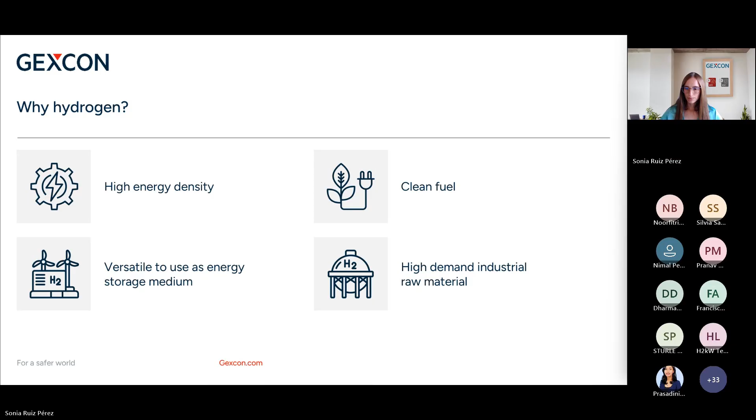So how abundant is hydrogen? Well, hydrogen is actually the most abundant element in the universe. It makes up about 75% of the universe's elemental mass. But on Earth, it's not quite as dominant. It only accounts for about 0.03% of the Earth's mass, and that's because it rarely exists on its own. It's usually bound up in compounds of water or hydrocarbons.

Still, it's estimated that we have around 1.8 trillion metric tons of hydrogen here on Earth. So the issue isn't really whether hydrogen is available. The real challenge is producing enough clean hydrogen to meet future energy needs.

According to the International Energy Agency, we will need around 530 million metric tons of hydrogen annually by 2050 to stay on track for net zero goals. So that's a huge leap from today's production levels, and also a major driver behind current investments and innovation in hydrogen technologies.

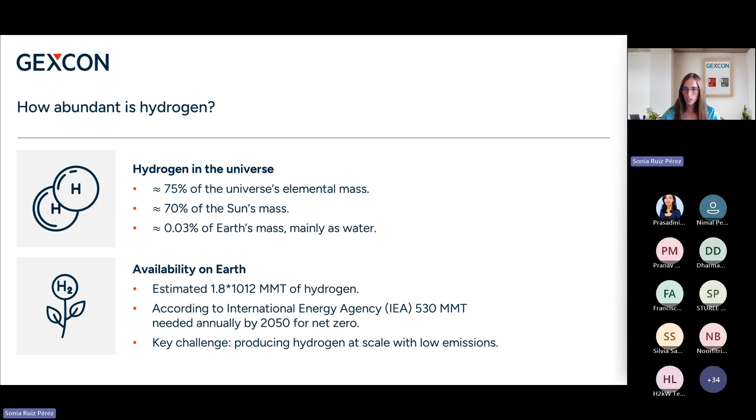Which takes me to the very important fact that hydrogen can be produced in several ways, and the carbon footprint varies significantly depending on the method. Brown hydrogen, for example, comes from coal via gasification, and it comes with very high CO2 emissions. Gray hydrogen is produced from natural gas and is currently the most common form of hydrogen, but it also releases CO2 into the atmosphere.

Blue hydrogen is similar to gray, but CO2 emissions are captured and stored using CCUS methodologies. Then we have white hydrogen, which occurs naturally underground. And this methodology is still in the early stages of exploration, but it's generating a lot of interest for future potential.

Green hydrogen, on the other hand, is the cleanest option for hydrogen production. Hydrogen is produced via electrolysis of water using renewable energy sources like wind or solar. Pink hydrogen uses nuclear energy to drive water electrolysis. So this is an important realization that not all hydrogen is created equal, and reaching net zero will depend on how quickly we can scale up low emission hydrogen production methods.

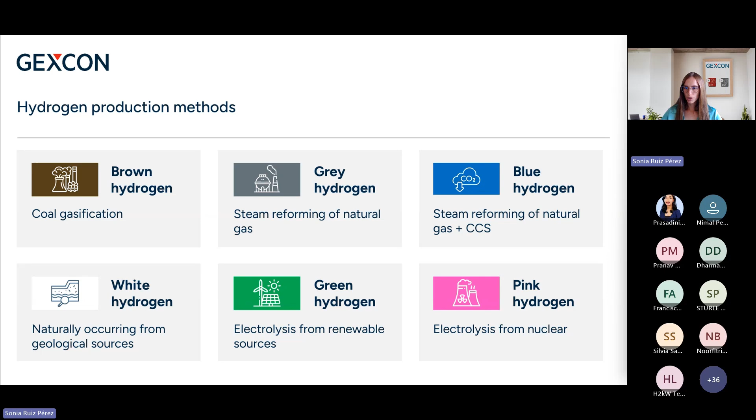So it is clear that hydrogen has a lot of potential, but it also comes with some unique safety challenges that we need to address, which is the main focus of today's webinar. So just to give you a bit of a run through the different unique properties of hydrogen. Hydrogen is extremely buoyant. So hydrogen gas typically rises up quickly, but in its cold liquid form, it can behave like a dense gas as well.

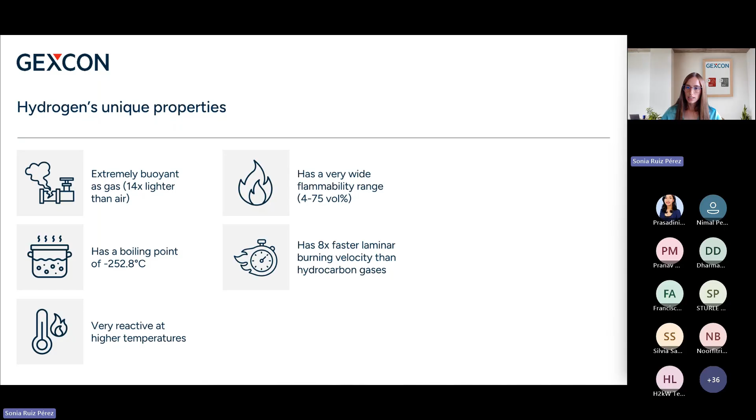Then liquefaction requires extremely low temperatures, near absolute zero, so near 0 Kelvin, which makes storage and transport quite challenging. Hydrogen is very reactive and has a very wide flammability range, which means that it can ignite in a wide range of concentrations in air. Hydrogen's laminar burning velocity is around 8 times faster than most hydrocarbons, increasing the likelihood of a transition to detonation. It requires very little energy to ignite, and it can auto-ignite at high pressures.

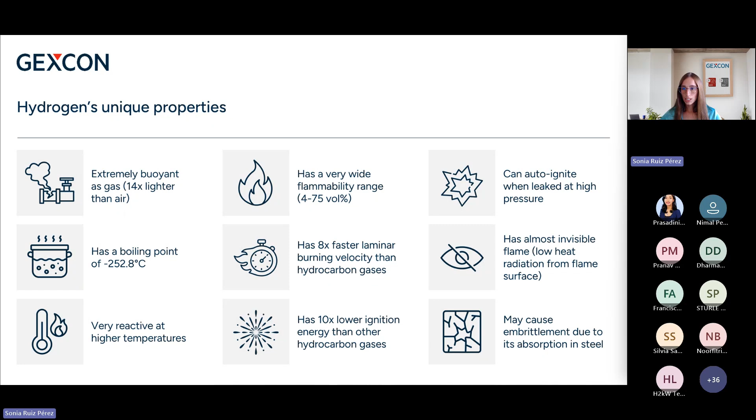Additionally, hydrogen flames are actually nearly invisible in daylight, posing certain detection challenges, and it can cause material embrittlement. So selecting the right material for hydrogen storage or handling in general is quite essential. So it's because of all of these unique properties that handling hydrogen safely means more than just care. It also requires a deep understanding of its behavior under different conditions. And that's where hazard modeling comes in.

Hazard modeling helps us predict the potential consequences of industrial accidents. So we can use hazard modeling for designing safer facilities, setting safety distances between equipment or between industrial facilities and urban areas, as well as to implement mitigation strategies such as ventilation, fire suppression systems, or physical barriers.

So depending on the hazard type, we apply different modeling approaches. We have fire modeling, explosion modeling, and dispersion modeling. Fire modeling evaluates thermal radiation. Explosion modeling estimates overpressures and shockwave propagation. And dispersion modeling simulates the spread of toxic or flammable gases. So it's with all of these insights that we can understand the potential impact. And that brings us to the next question, which is, how likely are these events to occur? And that's where the concept of quantitative risk assessment, or QRA, comes in.

QRAs typically consist of two different parts. We have consequence modeling and risk modeling. Consequence modeling predicts what happens if a hazardous release occurs. So it estimates the effects of fires, the effects of explosions, or the effects of gas dispersion on people and infrastructure. So it helps design safer facilities through prevention and mitigation. So that's the first step.

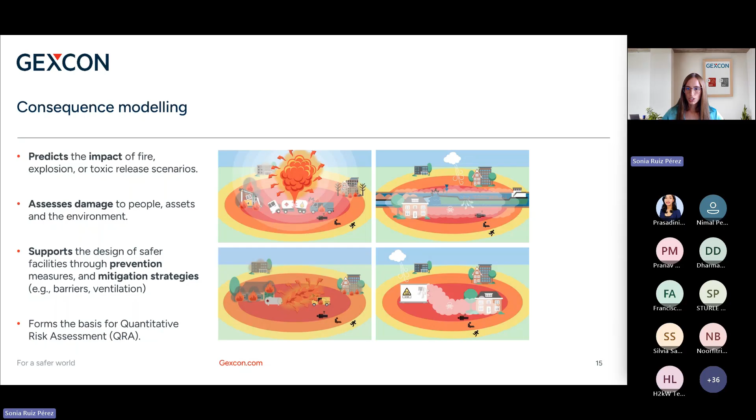But then, while consequence modeling tells us what could happen, risk modeling assesses how likely these events are, combining likelihood and consequence information. So typically, risk modeling uses failure frequencies, weather data, and probabilistic information about people, operations, and system reliability. So together, consequence and risk modeling can help determine if the risks at a facility meet safety regulations and whether that risk can be considered acceptable, or if it's not acceptable, it informs decisions on which are the best prevention or mitigation strategies.

Now that I've covered consequence and risk modeling, let's see how to make the whole process faster, easier, as well as more reliable. So using dedicated software tools like EFFECTS and RISKCURVES, you can really streamline this quantitative risk assessment, which will save you time and will lead to more accurate results.

EFFECTS and RISKCURVES are advanced modeling tools developed by Gexcon to support hazard and risk assessments. And they are both built to handle complex calculations while providing clear, consistent, and transparent results to support safety decisions. The main difference between one and the other is that EFFECTS focuses on simulating the physical effects of accidental releases like fires, explosions, and toxic dispersions, and translates these into potential impact on people and infrastructure.

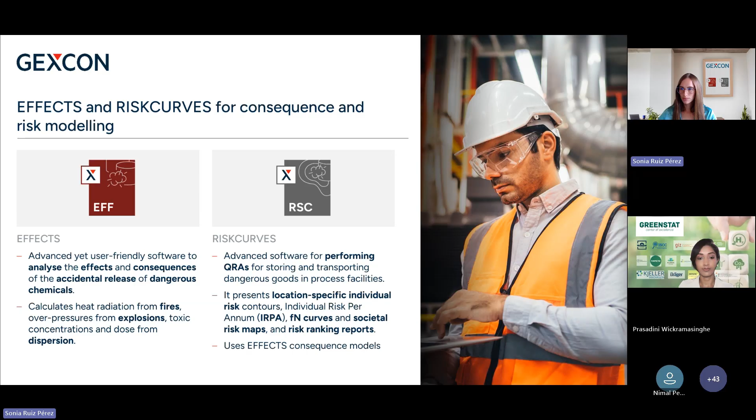RISKCURVES, on the other hand, takes those results further by performing full quantitative risk assessments using a range of risk metrics to quantify the overall risk. EFFECTS is commonly used for preliminary consequence assessments, sensitivity analysis, supporting process hazard analysis, and it plays a key role in compliance reviews, facility siting, and even incident investigations.

RISKCURVES is typically used for more advanced probabilistic studies, including full QRA studies, ALARP demonstrations, emergency response planning, and preparing safety cases for regulators. So together, they help organizations make well-informed decisions on risk reduction, design, and urban planning near hazardous facilities.

So these software tools are used in industries where hazardous materials are handled. So that goes from oil and gas, refining, petrochemicals, even to chemical manufacturing. And they are also vital in the energy transition, as we've adapted our models to support emerging technologies and chemicals like hydrogen, ammonia, battery energy storage systems, as well as CO2 in the context of carbon capture and storage.

So our mission is to enable a safe decarbonization, protecting people, assets, and the environment, while helping deliver reliable and affordable energy for both industry and society.

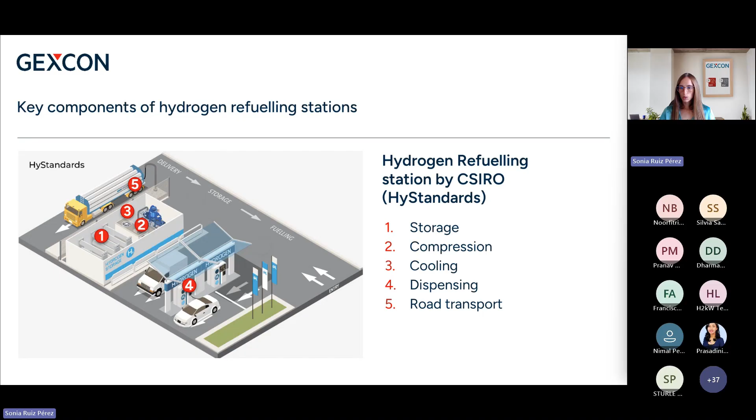So just like petrol or diesel vehicles, hydrogen fuel cell vehicles are refueled at purpose-built hydrogen refueling stations. A typical refueling station includes storage tanks for compressed hydrogen, compressors to pressurize the gas, a pre-cooling system to ensure safe and efficient fueling, a hydrogen dispenser where the vehicle is refueled, as well as transport, as hydrogen is delivered to the station by road. So understanding how these components work is key for identifying what are the potential safety challenges.

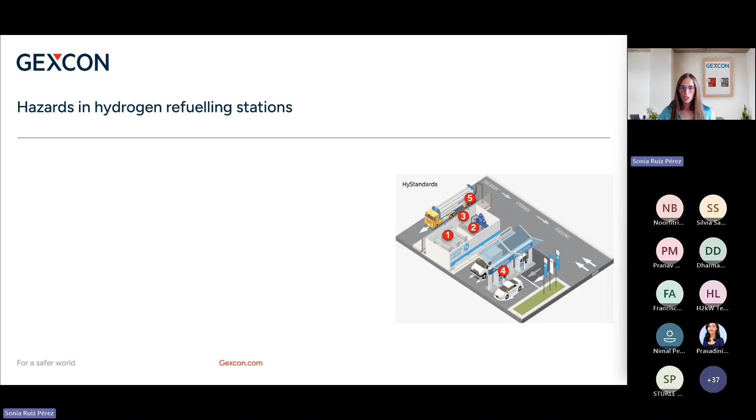So let's look at these different challenges on a hydrogen refueling station. So for this particular case, some common hazards at a hydrogen refueling station include leakage from storage tanks due to mechanical failures or poorly designed joints and fittings, pipeline leaks, particularly in high pressure sections, risks associated with compressors, such as internal explosions or leaks from worn seals,

and leaks during vehicle dispensing, often caused by improper procedures or insufficient inspection. So if not properly managed, all of these hazards can lead to serious accidents.

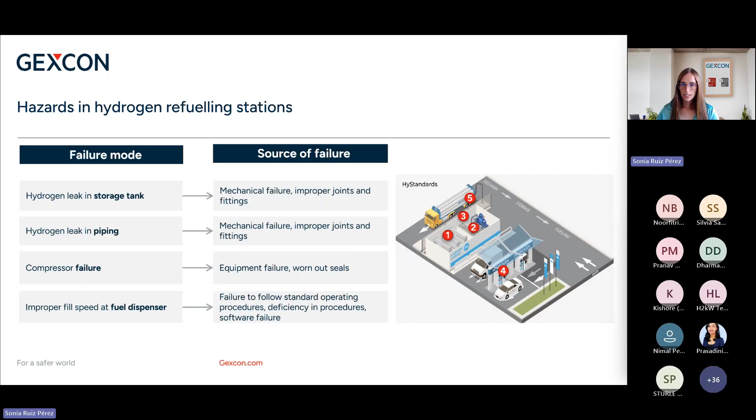So building on these different hazards that I just covered, it's important to understand how compressed hydrogen is handled at refueling stations. So these hydrogen refueling stations supply high purity, high pressure hydrogen fuel to two main vehicle types. There's light duty vehicles like passenger vehicles, and there's heavy duty vehicles such as trucks and buses.

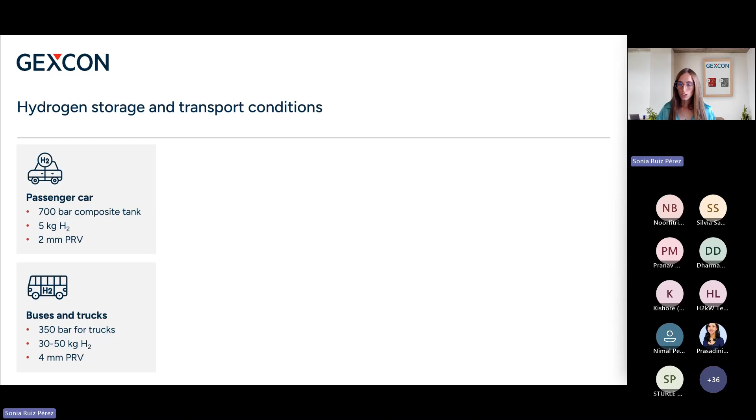Typical operating pressures differ. So passenger vehicles, for example, usually have 700 bar composite tanks holding about 5 kilograms of hydrogen. And they are equipped with a 2 millimeter pressure relief valve, meaning any accidental release would leak through a 2 millimeter opening. Buses and trucks use tanks at 350 bar, storing up to 50 kilograms of hydrogen with a 4 millimeter pressure relief valve.

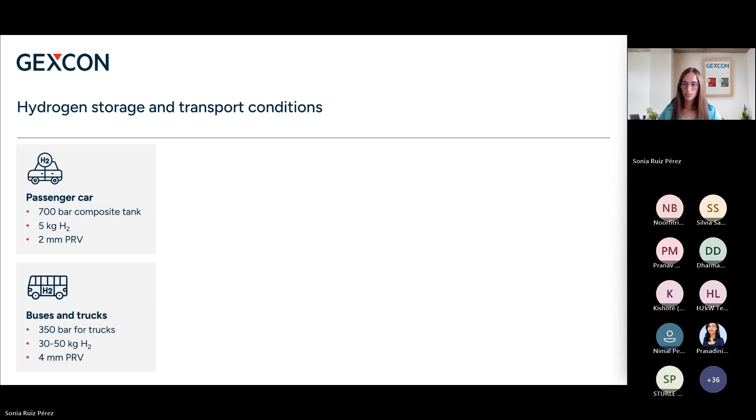When it comes to hydrogen distribution, compressed gas is transported primarily by tube trailers. So most of these tube trailers have 10 cylinders pressurized at 200 bar, each with a 2 cubic meter capacity. Then we have carbon fiber composite cylinders, which are also common. And these are arranged in vertical packs, storing up to 500 bar with about 350 liters of hydrogen each.

Then we also have cylinder packages, which can include multiple bundles. For example, they're typically transported in 16 packages holding 27 cylinders, each at 200 bar.

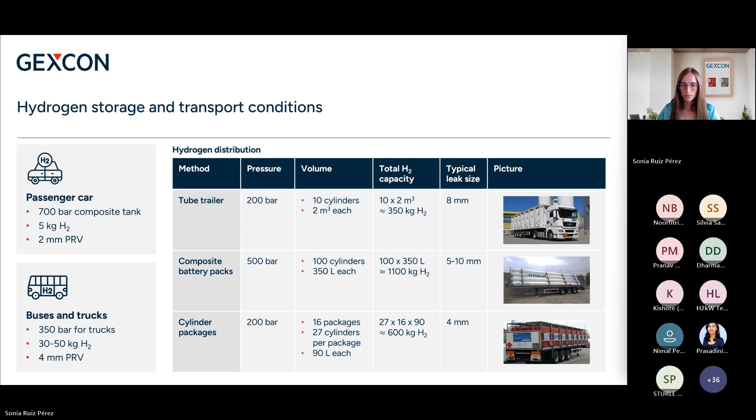So a very common hazard at the hydrogen refilling station is a leak during unloading from the delivery truck. This can happen if the delivery hose fails, causing high pressure hydrogen to escape.

To simulate this accurately, we need a few key details, specifically around operating conditions. So the hydrogen in this particular scenario is stored in composite cylinders, which, as I just said, the operating pressure is usually around 500 bar. Each of these cylinders holds about 350 liters of hydrogen, and the leak would come from a 10 millimeter hose. So these inputs can help us simulate the potential effects and evaluate the risk of the scenario.

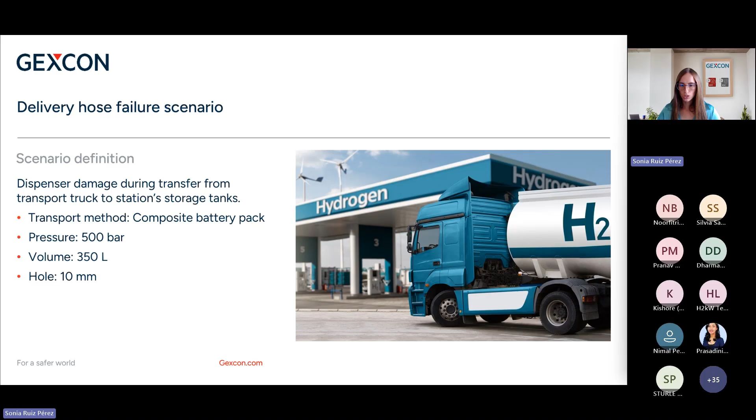So we know that there's a release of hydrogen through a cylinder that contains 350 liters of hydrogen at 500 bar, which is released through a hole of 10 millimeters. When modeling a hydrogen leak, one of the key steps is to understand what could happen next. What are all the potential loss of containment events? And that's where an event tree comes in.

Second possibility is that we have the immediate ignition of hydrogen, which can cause a jet fire. This jet fire is a high velocity, high temperature flame that follows the path of the leak. And the third option is delayed ignition. So the flammable cloud of hydrogen doesn't encounter an ignition source until it's dispersed along wind for a little bit. So we have a generation of a flammable hydrogen cloud that ignites a little bit after it's been released.

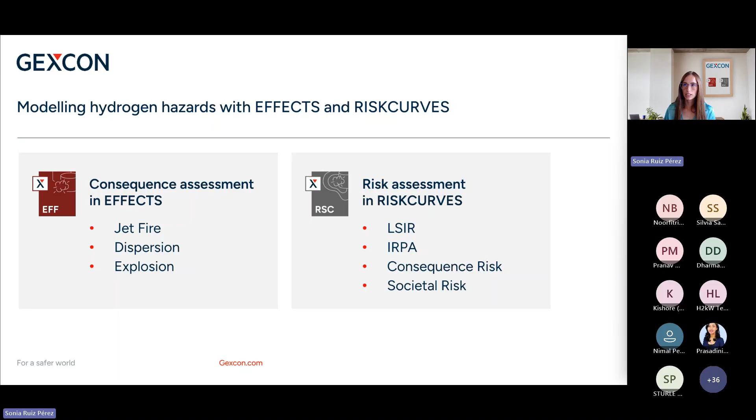So let me start using Effects to simulate these different physical effects. This way you can see what is the heat radiation from hydrogen jet fires, what are the overpressure levels from a hydrogen vapor cloud explosion, and what's the concentration in a hydrogen flammable cloud for this specific scenario that I've just defined.

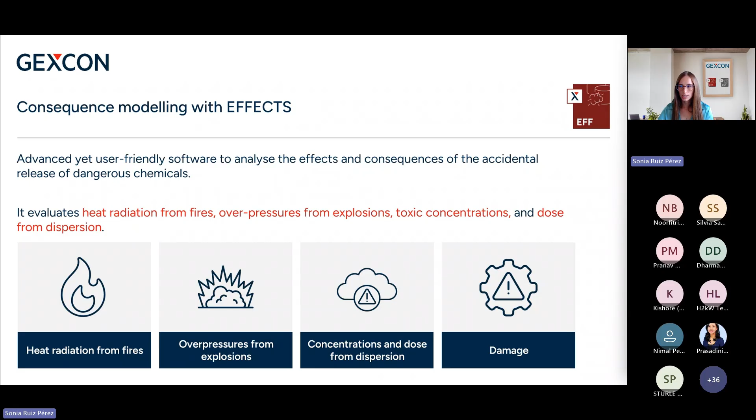So let's first focus on the immediate ignition branch of the event tree. So if we have hydrogen being released and it encounters an ignition source straight away, this results in a jet fire. And this event is especially dangerous because jet fires can deliver intense thermal radiation, and they are directional, following the momentum of the gas, and they can persist as long as the release continues.

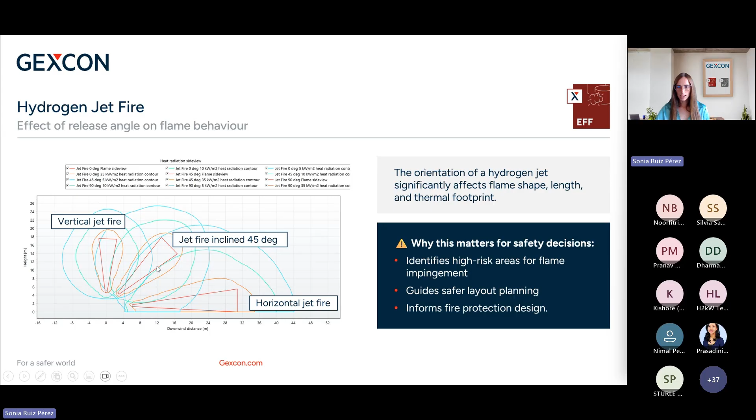So these differences are important for assessing things like flame impingement, planning equipment layout, and designing effective fire protection measures. So for instance, one of the most common protection measures is firewalls. So you could use this type of information to help design such a firewall, like where it would need to be placed and what would be the required height of such a firewall to ensure that it's blocking the effects of a jet fire.

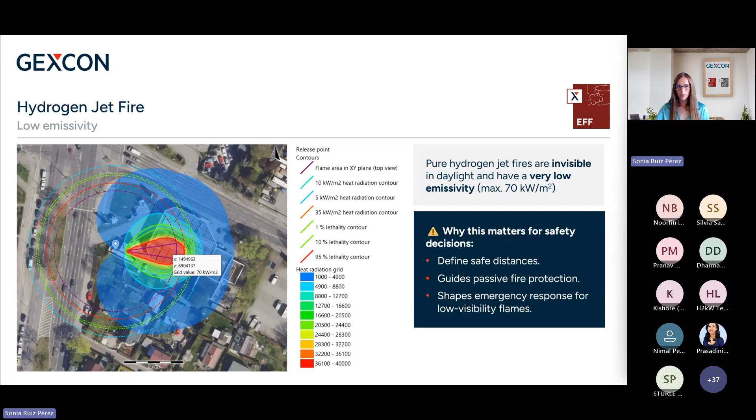Now, let's look at another possible outcome, which is the delayed ignition. In the case of delayed ignition, hydrogen leaks and disperses, forming a flammable cloud. If that cloud encounters an ignition source before dispersing completely, it ignites as a flash fire, which is a fast-moving flame front that follows the cloud.

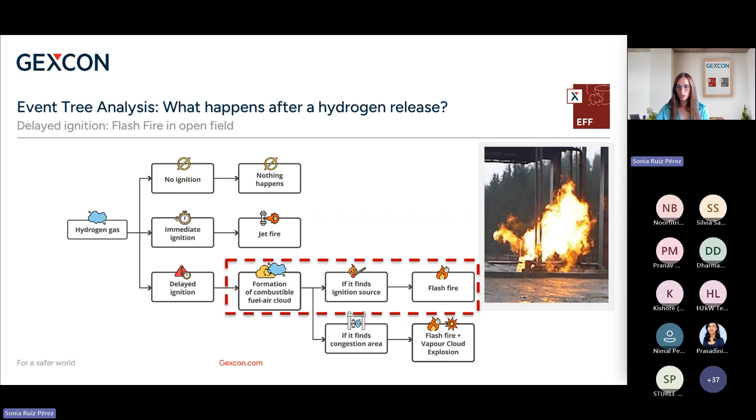So from a safety perspective, this type of behavior has important implications because gas detectors, for instance, should be placed low at the ground near the release point, but also consider accumulation under ceilings or overhangs where this rising hydrogen cloud could ignite.

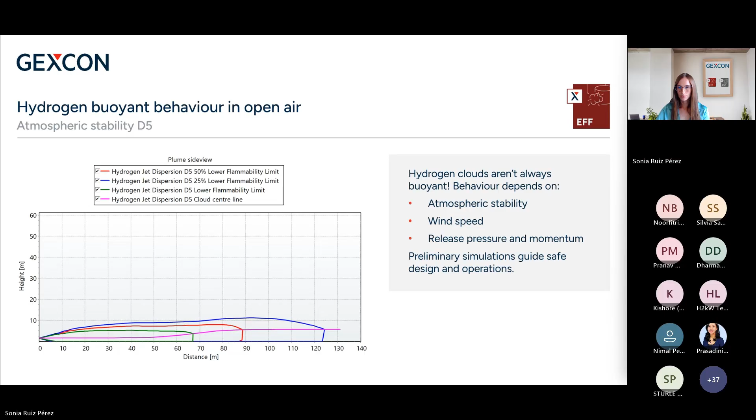Now, if the flammable hydrogen cloud drifts into a congested or a confined area, ignition can trigger not only a flash fire, but also a vapor cloud explosion. So as I explained earlier, this hydrogen release occurs at a refueling station, which is this one over here. It's just located a few meters away from a conventional fuel station.

And this regular refueling station actually introduces a critical hazard, and that is that the roof of the regular refueling station creates a confined corridor between the ground and the ceiling, which is an ideal geometry for trapping a flammable cloud. This setup can significantly increase the risk of detonation, as it restricts vertical cloud dispersion and promotes turbulence upon ignition, which ultimately amplifies overpressure.

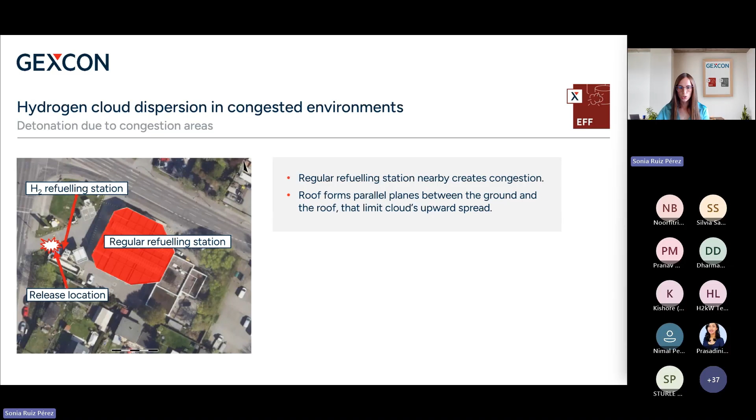And we can assess the hazard using different flammability thresholds, like the LFL, lower flammability limit, which is the minimum concentration needed for ignition, as well as the 50% LFL, where ignition is still possible, and 25% LFL, which is a conservative boundary used for safety planning.

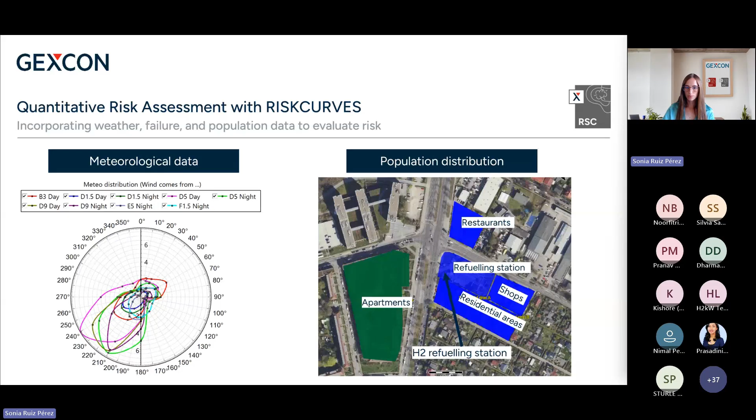Now, let me explain the different risk metrics calculated in RISKCURVES and the results produced in this QRA study. First of all, we have location-specific individual risk, which is the annual probability that a person outside the facility is fatally affected by a hazardous event. And this metric assumes that the person is unprotected, so that means no shelter, no protective gear. That's also a reason why location-specific individual risk is actually a very conservative estimate, because people usually spend limited time outdoors or limited time in certain areas, like they move around different zones.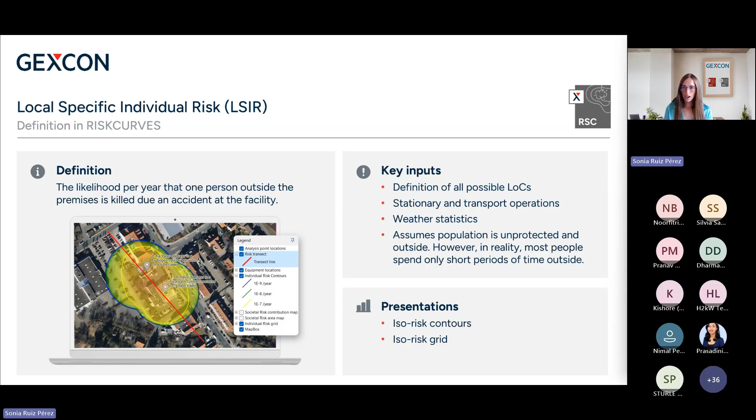What we see in this simulation result over here is the total location-specific individual risk for the hydrogen refueling station, which covers all hazards and all leak scenarios modeled in EFFECTS. That includes all jet fire possibilities, vapor cloud explosions, etc.

So while criteria vary by country, vulnerable developments like apartments, hospitals, and schools are generally not allowed inside the 10 to the minus 6 risk contour, which is, as you can see, the orange shaded area. So there's no vulnerable areas allowed within the orange shaded contour.

What you can see here is that this orange contour actually extends to the regular gas refueling station. And there are shops located here in the east, but this contour doesn't reach it. And there's a residential area south from the refueling station. And the 10 to the minus 9 contour does reach this area, but that is usually acceptable. So it's not within the orange contour.

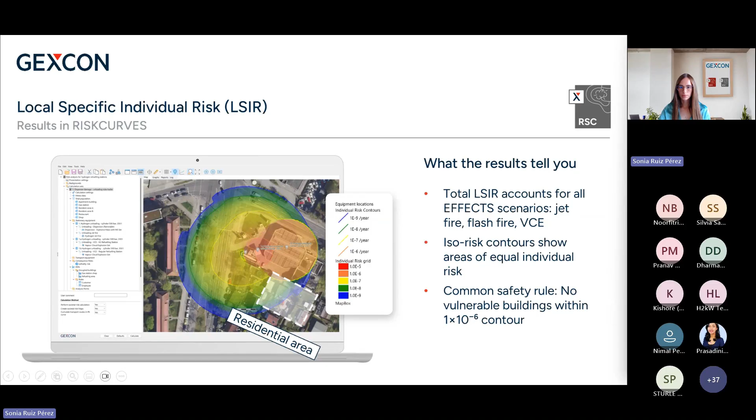So I said that location-specific individual risk might be quite conservative. And that's the reason why IRPA is typically calculated as well. So this offers a more realistic risk assessment by accounting for building occupancy and protection measures. So it supports better safety and emergency planning. Calculating IRPA involves defining occupied buildings, number of people, what are their roles, what are their movement patterns, and their protection factors.

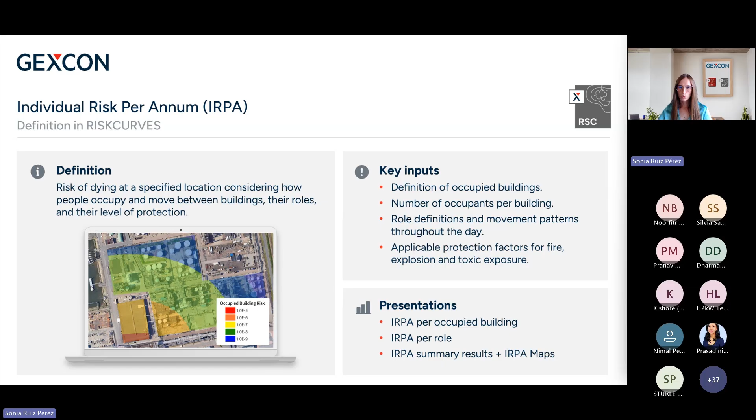So what IRPA simulates is where each role spends their time throughout the day. There are different ways of presenting IRPA based on the occupied building or the defined role. So let me show you how to interpret these results with an example. So going back to our use case, let's evaluate IRPA around the hydrogen refueling station. There are two main areas with people that could potentially be exposed to the hydrogen release due to this failure in the delivery hose: the gas station shop, and the refueling area.

In the shop, let's assume there are 10 people present 50% of the time with protection. And in the refueling area, there's one person present 50% of the time without protection. RISKCURVES allows you to define specific roles and occupancy patterns. So a customer could spend, let's say, 6 minutes per day in the shop and 12 minutes a day in the refueling area, whereas an employee of the gas station works 7 hours per day in the shop and is at the refueling station for 2 hours a day.

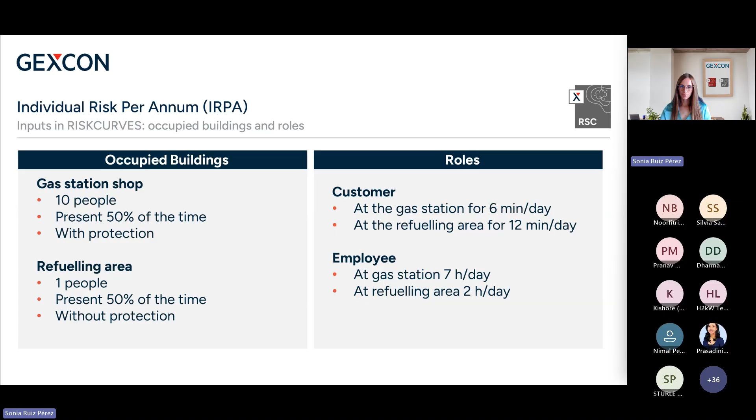So this information is essential for calculating IRPA, which accounts for both exposure time and protection levels, leading to a more realistic risk assessment. So once those roles and buildings are defined in RISKCURVES, IRPA can be presented in different ways. So first of all, IRPA can be calculated for each occupied building. In the context of our use case, an occupied building or an occupied area would be the shop at the gas station and the refueling area.

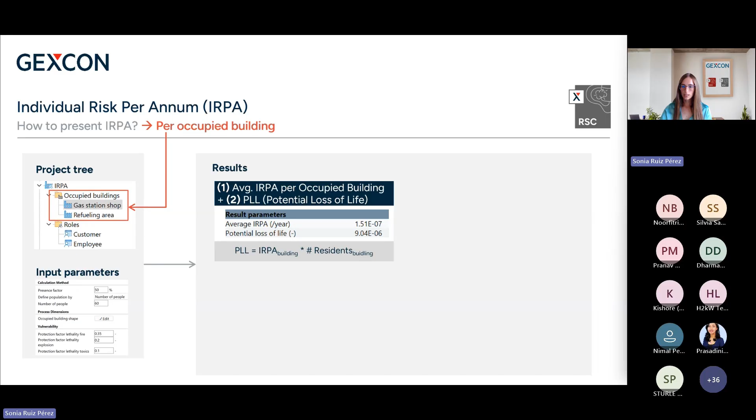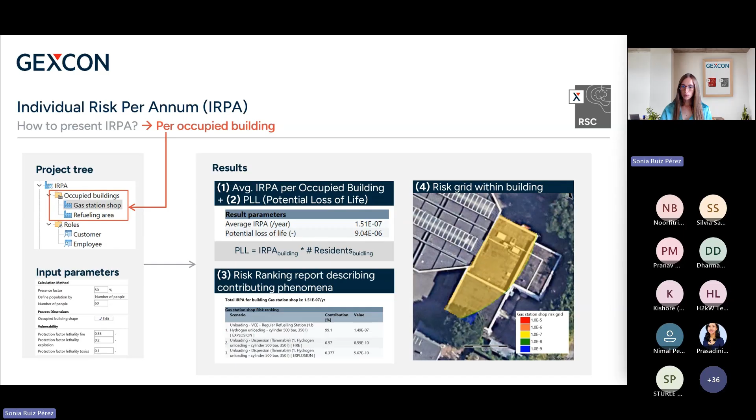For each building, you define the number of people present, their presence factor, and their protection against fires, explosions, and toxic releases. And these results include IRPA for individuals within that building, potential loss of life calculated by multiplying IRPA for that building with the number of occupants, a risk ranking report showing the most significant contributing phenomena to each of those buildings, and a geographic risk grid, which highlights building-specific risk on the map. This can provide a clear understanding of which areas of the facility pose the highest risk to occupants.

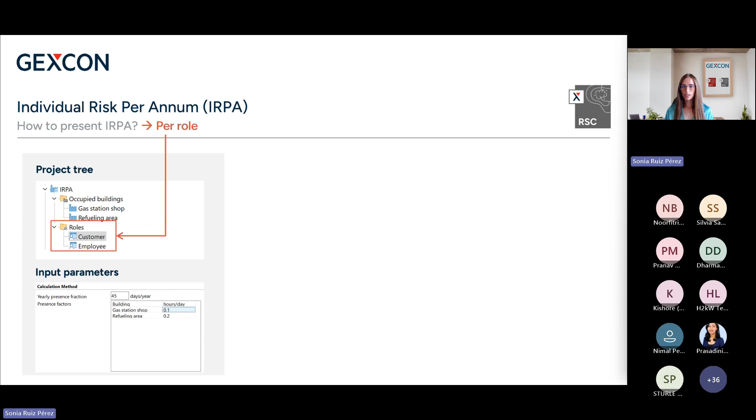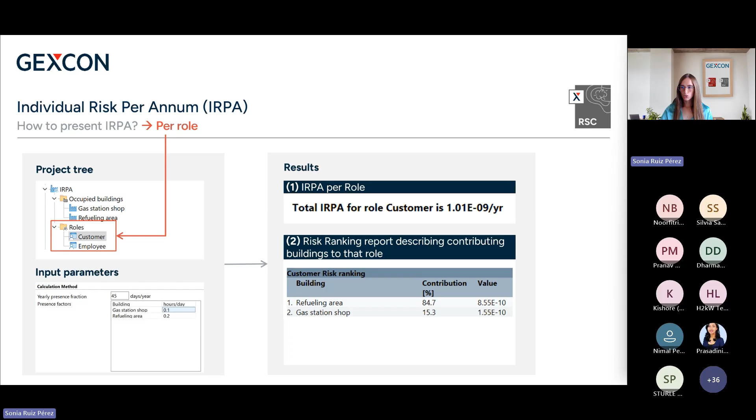The second method presents IRPA based on employee roles. In this context, those can be customers and employees. And each of these roles has a different risk profile depending on their movement throughout the facility and the time spent in each location. So what the results show is IRPA per role based on their daily routine and location exposure, and a risk ranking, identifying which buildings contribute the most to each role's risk.

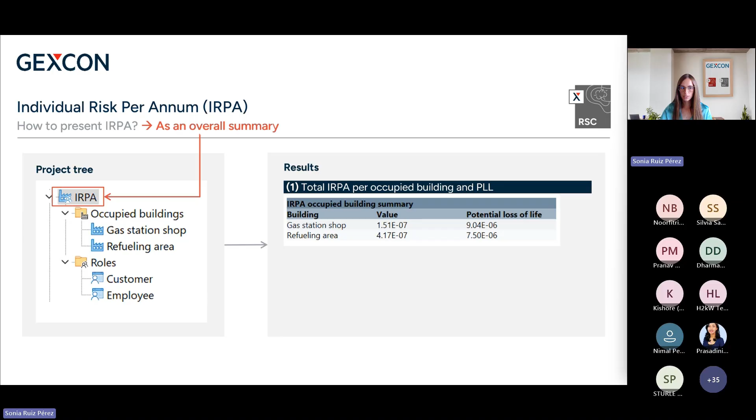The third option is the IRPA summary report, which brings everything together. So this report provides a high-level overview of individual risk per annum across the facility, which brings together results from both previous methods. We have a building level summary of IRPA and potential loss of life, and a role level summary showing how each employee group is exposed across the site. So it's this consolidated view that supports the high-level decision-making required to help prioritize safety measures for both people and infrastructure.

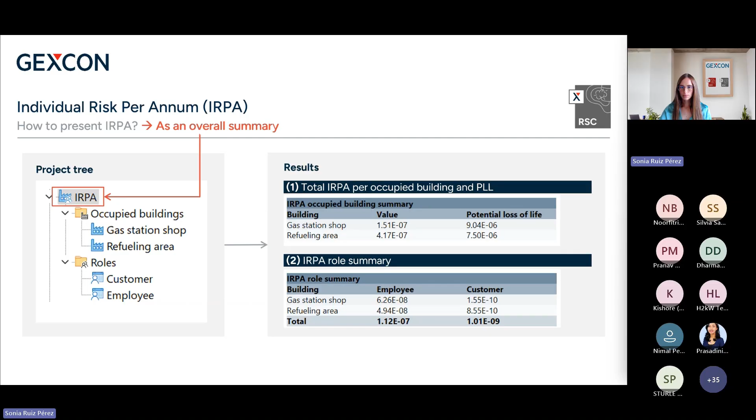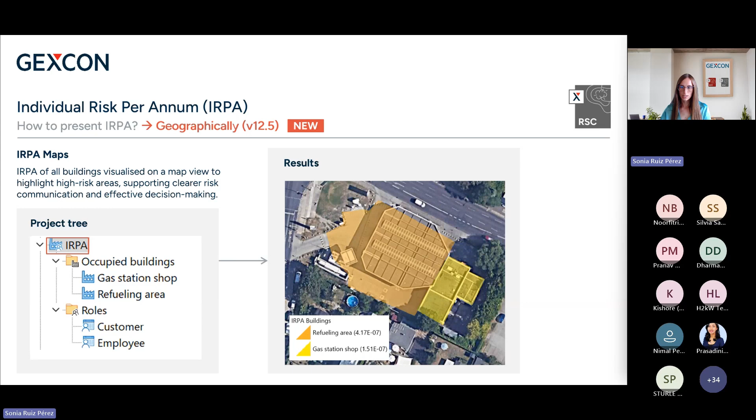One of our newest functionalities is that this IRPA summary can now be visualized geographically on a map, which is what you see in this slide, which makes it a lot easier to identify high-risk areas spatially and geographically in the map, communicate risks more effectively to stakeholders, and visually guide where improvements are most needed. So this map-based presentation provides a more intuitive and real-world perspective of who is at risk and also where, which is very important to understand what can be done to reduce risk. So in short, this IRPA risk metric transforms static risk assessments into dynamic, human-focused insights, helping you reduce risk where it matters the most.

And we have societal risk as the annual probability that an incident causes multiple fatalities due to the presence of people within the impact area. So it accounts for protective equipment, indoor and outdoor presence, population distribution, and building use. And the results are typically shown as an fN curve, which plots event frequency against the number of potential fatalities.

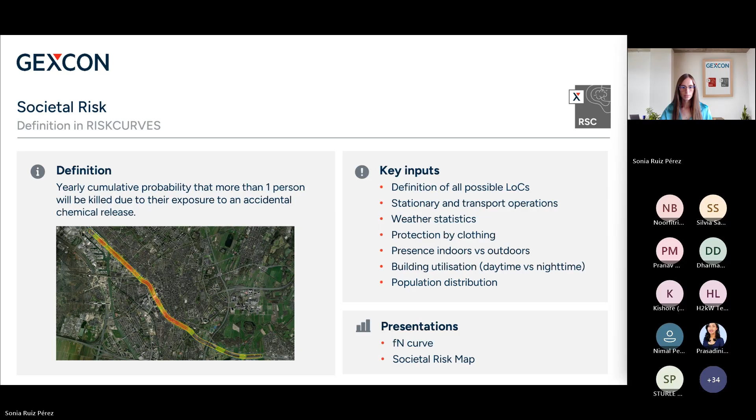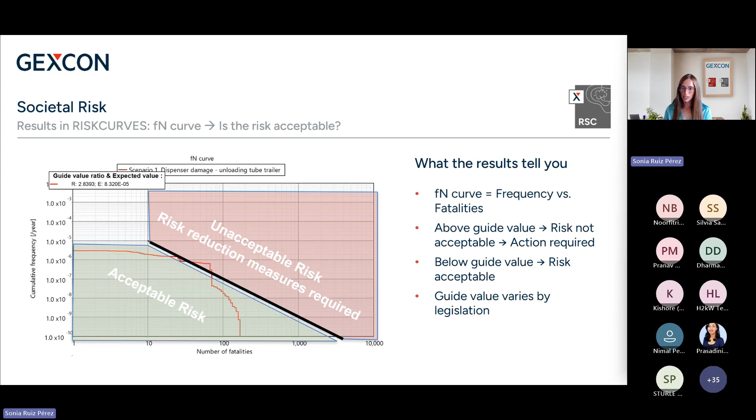And also very important to keep in mind that this guide value, the black line, depends on local legislation and may vary by country or region. So like the slope, the starting number of fatalities, the ending number of fatalities, that changes depending on regulation. As I said, in this example, the fN curve, the red line, exceeds the guide value. So for this particular hydrogen refilling station, you need additional safety measures to reduce the risk to acceptable levels. However, how can you know where to apply risk reduction measures?

And that's where the concept of societal risk maps comes in. So the fN curve is a 2D graph. It doesn't give any information about where geographically we can reduce the risk. So to identify where risk reduction is needed, RiskCurves also generates these societal risk maps. They are a geographical breakdown of societal risk, highlighting which areas contribute most to the overall risk. The societal risk area map shows the size and level of risk bottlenecks, whereas the societal risk contribution map shows the cause of the risk bottlenecks, identifying which locations contribute the most to the overall risk.

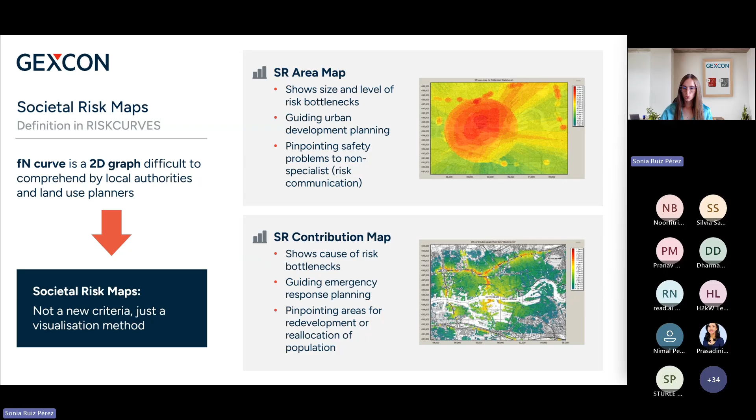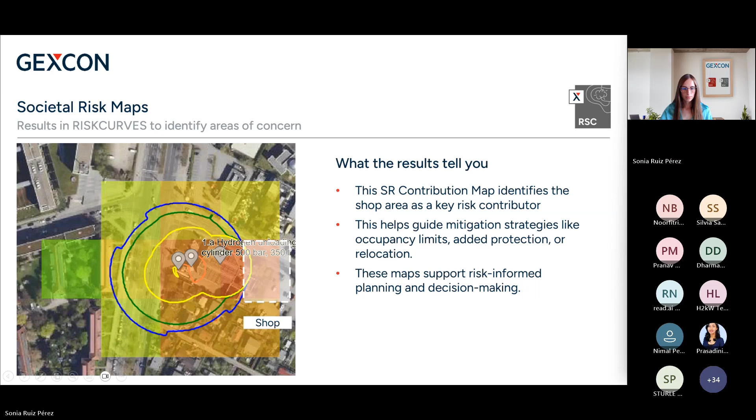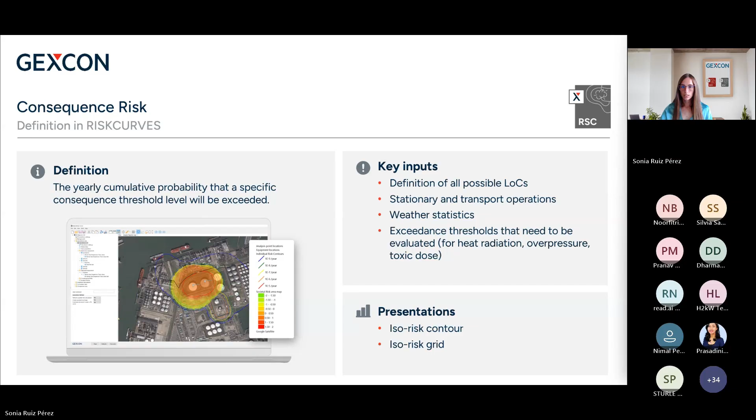And consequence risk measures the likelihood that a specific hazard threshold is exceeded. In this example, we calculated lethality risk, which is a type of consequence risk that estimates the probability of exceeding lethal thresholds. So that's specifically an overpressure above 300 millibar and a heat radiation above 35 kilowatts per square meter. So these levels correspond to critical conditions that can cause fatalities.

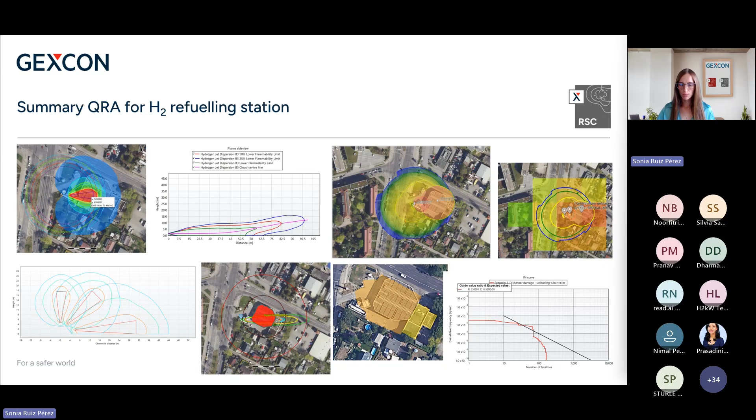So just to wrap up, conducting a comprehensive QRA using EFFECTS and RiskCurves can enable the evaluation of both consequences and risks associated with hydrogen refueling stations. And I've demonstrated how these tools can simulate a wide range of scenarios and quantify risk using different risk metrics. Just to provide some key takeaways, hazard modeling is a critical part of ensuring safe operations. Accurate assessments require detailed modeling of fires, explosions, and toxic and flammable dispersion.

EFFECTS includes advanced tools like 3D congestion modeling, which helps capture the influence of obstructed areas on hazard behavior. And RiskCurves quantifies risk by integrating failure frequencies, meteorological conditions, and population exposure. Risk metrics like location-specific individual risk and IRPA can support decisions in land use planning and on-site and off-site safety, whereas FN curves provide a broader view of community-level risk, where we have societal risk maps to visualize the risk hotspots, which can support safety investments and urban planning decisions.

So in summary, these software tools can provide a powerful science-based framework to help industries and authorities manage hazards, as well as to improve safety and naturally protect people, assets, and the environment.

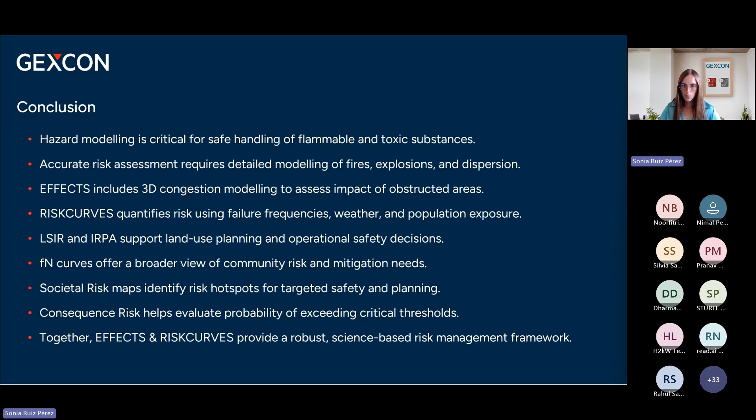And I hope this gave you a good overview of the different hydrogen hazards and, in the context of hydrogen refueling stations, the different hazard modeling strategies that we can use to make better safety decisions.